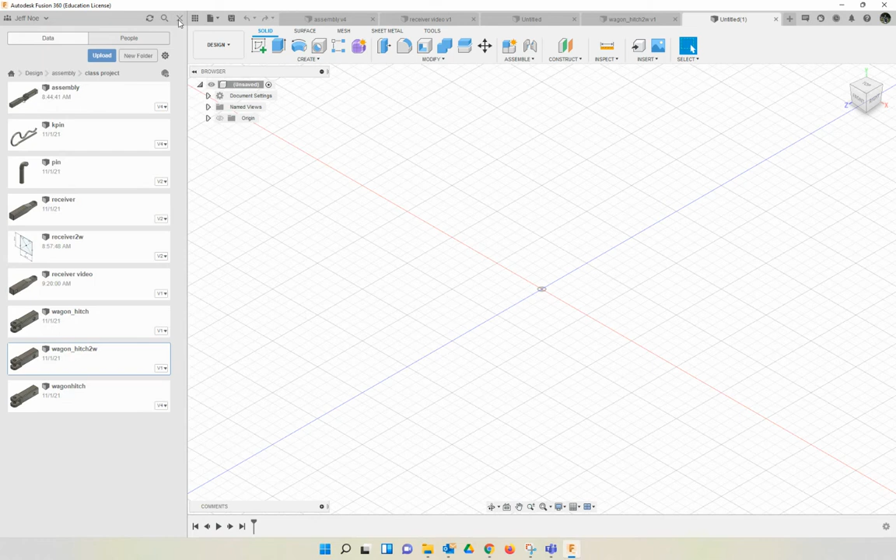Let's get started. All right, new canvas. There's my mouse, here we go. Close the data panel. First thing we're going to do is create a new component. I'll name it wagon hitch, and click OK.

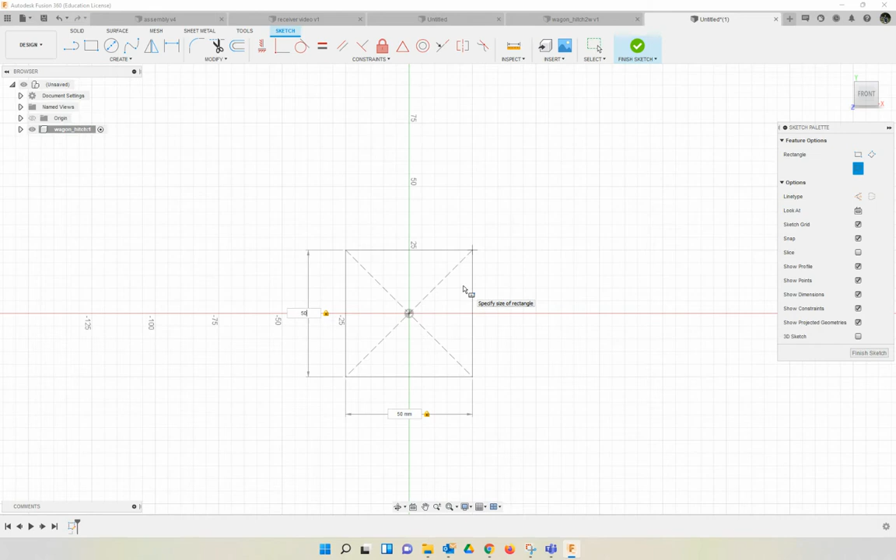Create sketch on the front back plane. Once again we're going to go with center rectangle, 50 by 50. Let's hit E to extrude, and we're going to go negative 150 millimeters, new body, click OK.

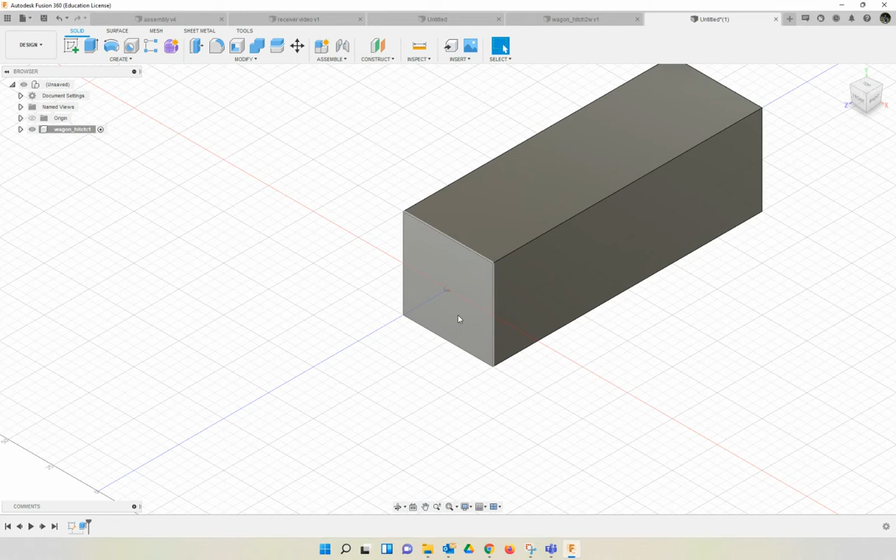Okay, so we're going to start building out from the front side of this, where we're going to make a little bit larger plate. Notice how the plate increases in size. We're going to come out about 15 millimeters. Yeah, that's 15 millimeters. We are then going to draw the top and bottom tongue, which should be 50 by 24 to 50 by 18.

Let me check the instructions real quick. 50 by 18, okay, they'll leave a 24 millimeter gap. This is 50 by 60, or 60 by 50. We're going to come out 60 millimeters. Then with the two rectangles we draw here, the 50 by 18, we're going to round off those corners and put our holes in place.

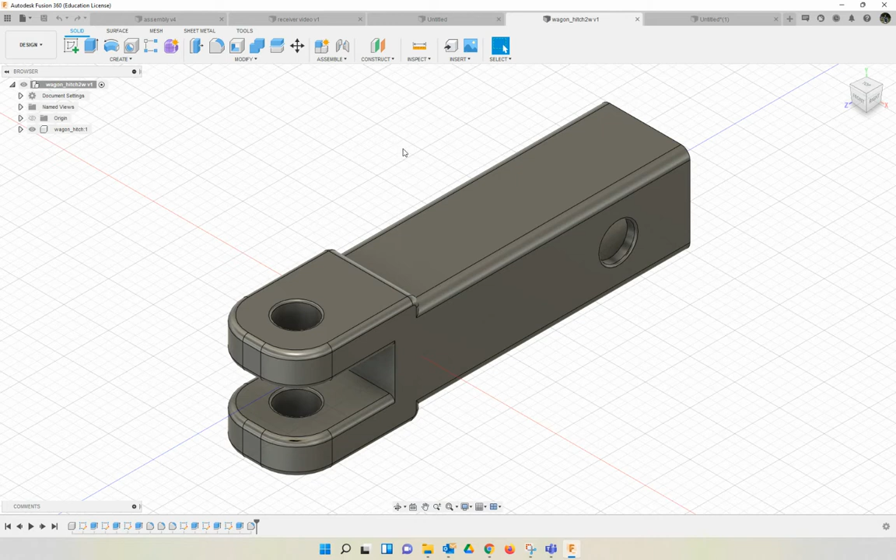All right, so let's get back to our design. Let's create a sketch. We're going to select the front face of this, so do not click on a plane - I'm going to click up here. I'm going to draw a center rectangle, 50 millimeters wide by 60 millimeters tall. Okay, got that? Enter.

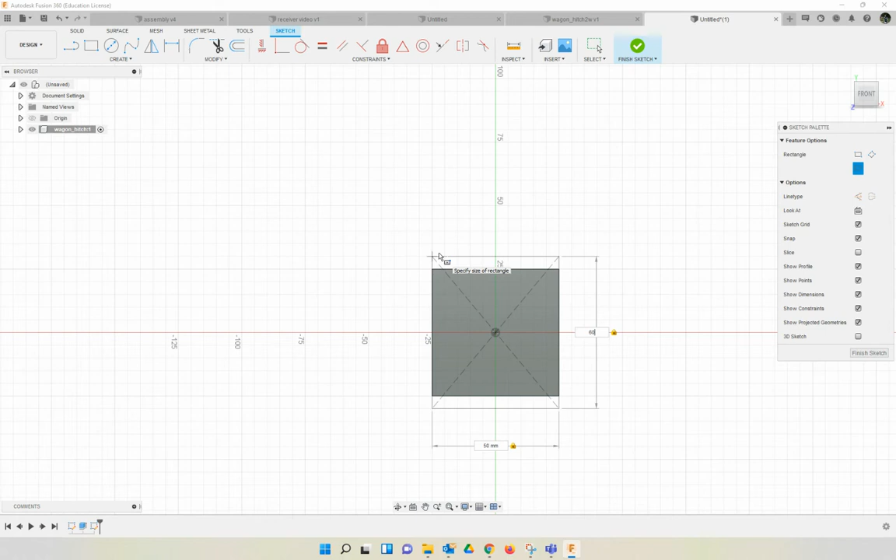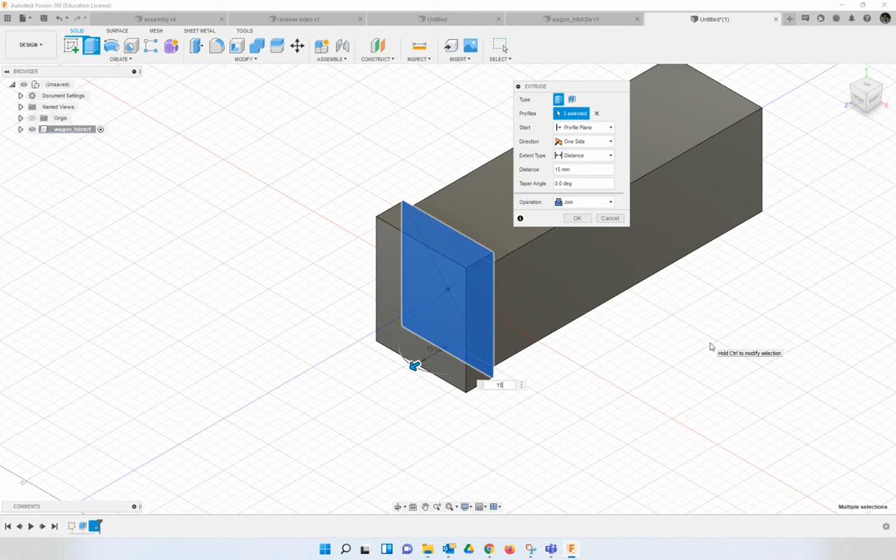All right, and we are going to extrude that 15 millimeters. Now we're going to have to select these three sections, okay, and 15 millimeters is what we'll extrude. Looks good, join is the operation. Good, now we're going to create our next sketch, once again on the front face.

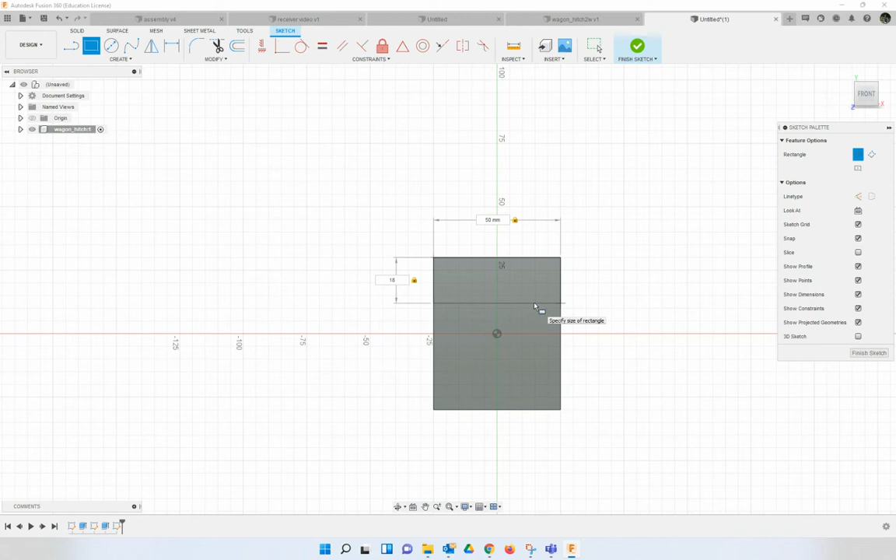Create sketch, select the front face again. This time we're going to go with a 2-point rectangle. We're going to start in the upper left corner, and it's going to be 50 millimeters wide by 18 millimeters tall, so we take that upper section of the plate. Good, we're going to do the same thing from the bottom - 50 millimeters wide, 18 millimeters tall.

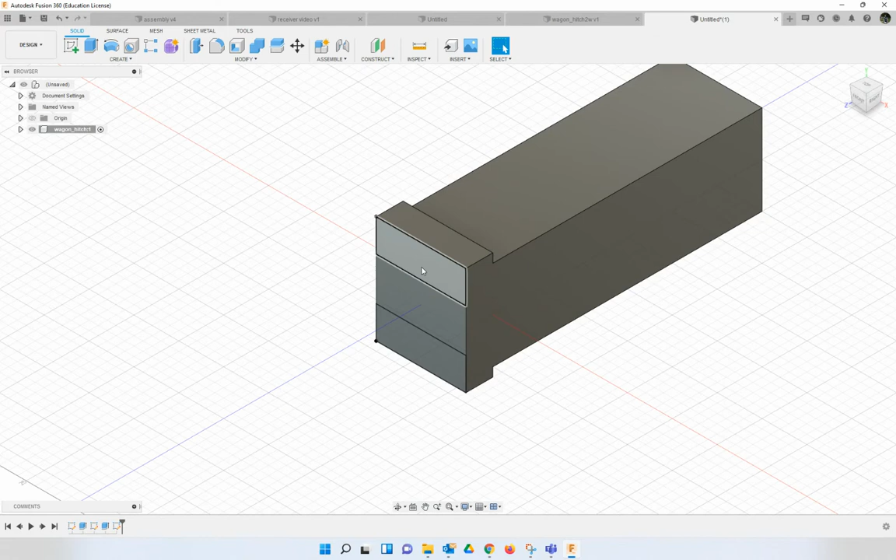Finish sketch, go to home position so we see our two shapes there. And we are going to extrude those by 55 millimeters. So extrude, select the first one and the second one, 55 millimeters. Good, there we are.

We are next going to start rounding off some edges here, okay? So we're going to add a 5 millimeter fillet to the 4 edges along the tube, the top edge here and the bottom edge here. So let's go ahead and do that.

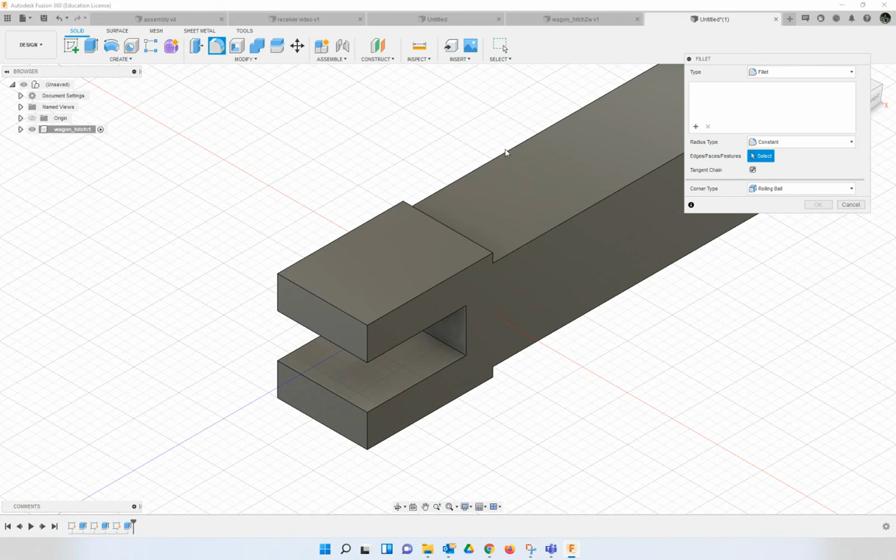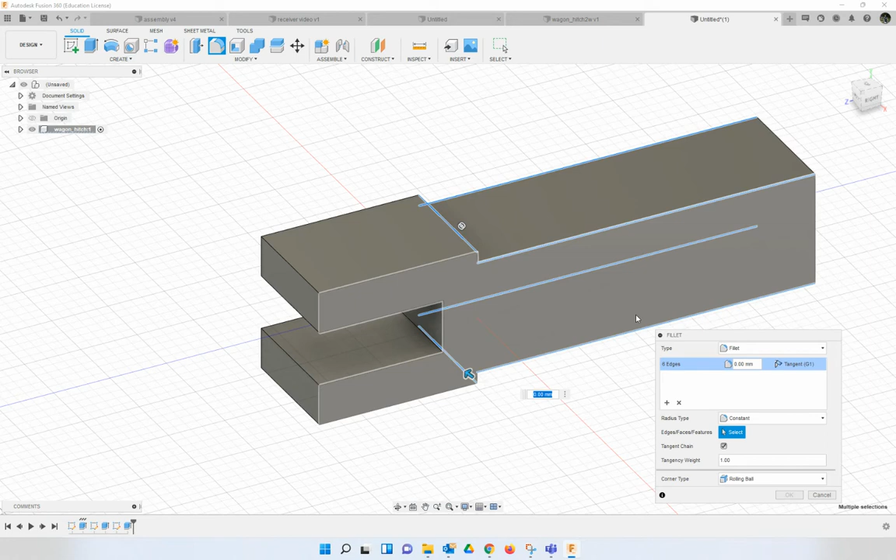Fillet - let's select all 4 of these edges. 1, 2, 3 - where is that? He's hiding back in there. There it is, there's the fourth one. Let's get this edge and that edge, 5 millimeters. Click OK. Now the order in which we do this is important.

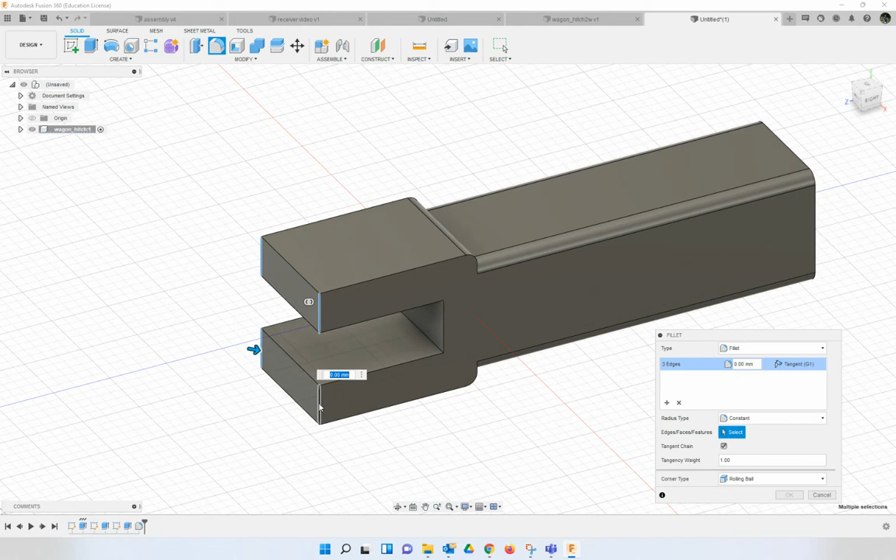Now we're going to take the 20 millimeter fillet on these edges - 1, 2, 3, 4, 20 millimeters. So that gives us a nice rounded edge on the ends of the tongue.

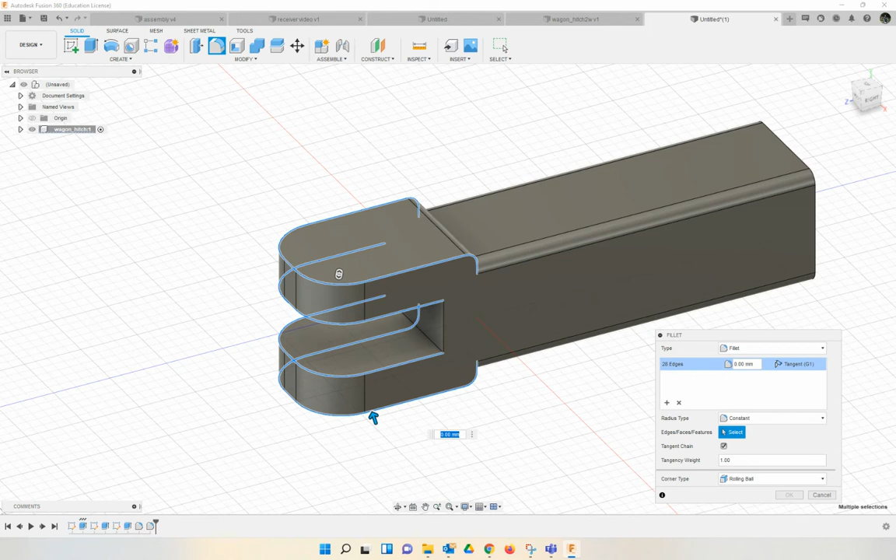Click OK. I want to add a 3 millimeter fillet to these 4 edges. So let's go fillet - there's corner 1, corner 2, 3, and 4. And I believe that's 3 millimeters. Yes it is, 3 millimeters. Click OK. All right, that looks pretty good.

Now, this being the end of the wagon, the tongue of the wagon - if that was a solid piece of steel, that'd be incredibly heavy to try and lift and put on the hitch of the tractor. So we're going to hollow it out, lighten it up a little bit.

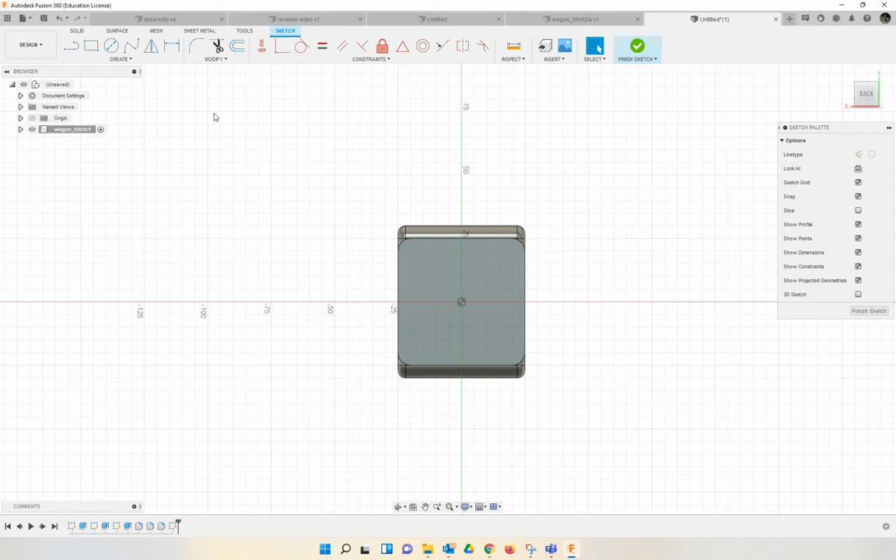So let's go and create a sketch on the back side of our design. Create sketch, we'll select the back. We're going to offset by 5 millimeters. There we go. Negative 5 would be best. Enter, we're going to extrude.

Hit the E key, finish the sketch, select my plane. We're going to cut away negative 135 millimeters. All right, looks good, click OK. So we've hollowed out the end now.

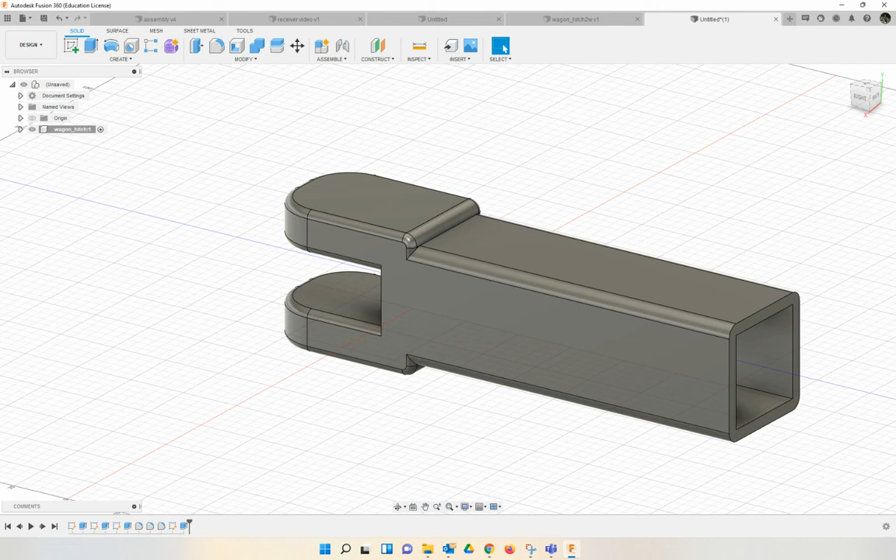All right, and now we will need to cut a hole in the back. Oh, I missed the sketch there. All right, let's create sketch - doesn't make any difference, we're good. Right on this face, turn on construction. We're going to go find the center point. Right there it is, click, 40 millimeters. The end point will serve where for the center of our hole we're going to create.

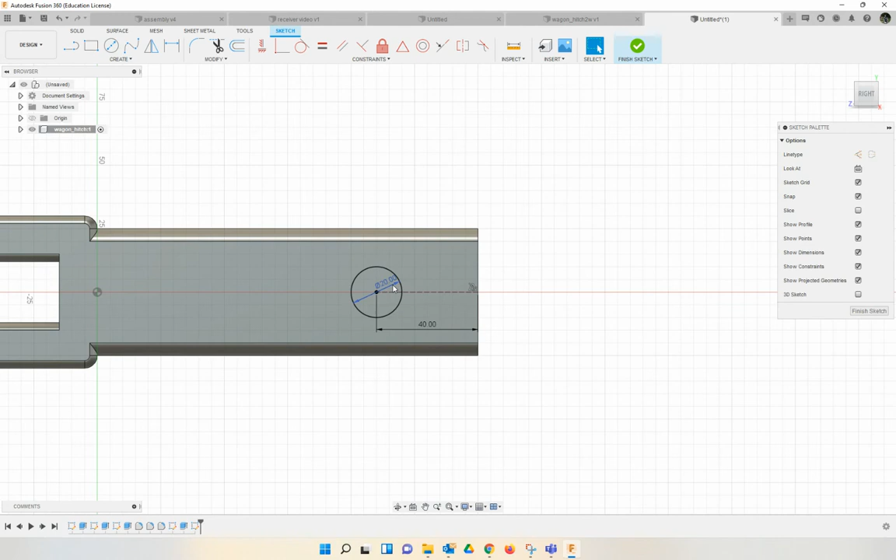Turn off construction, center diameter circle. The end point here, 20 millimeter circle. There we go. Let's hit E to extrude, finish, and it finishes our sketch. Select our circle, let's drag it through the other side. Good, cut is our operation. Click OK. Now we have a hole in the back, so we could interchange our hitch type.

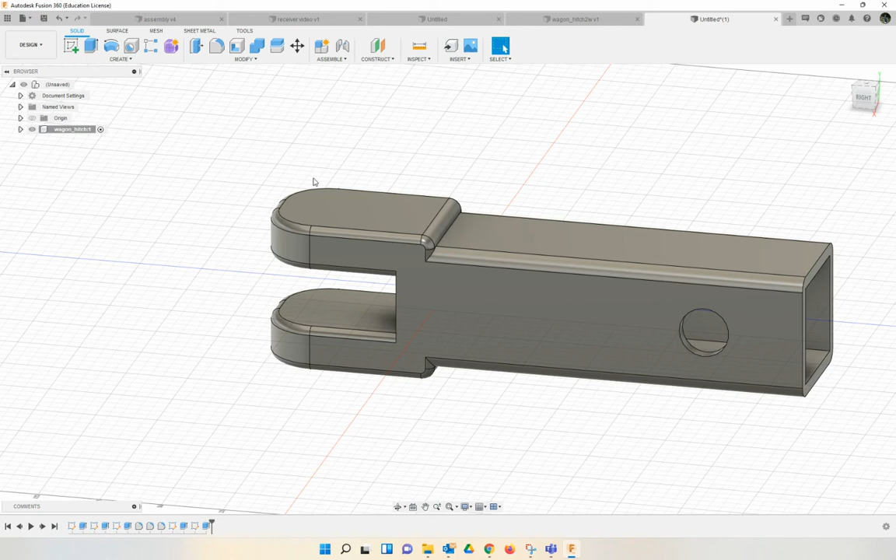And now we need to create the hole in the tongues. So let's create sketch - we're going to select this top face on the tongue here. We're going to turn on construction, and we're going to draw a 22 millimeter line. Find that center point - notice the edge I'm on, okay, not the outer one this time. Click, 22 millimeters.

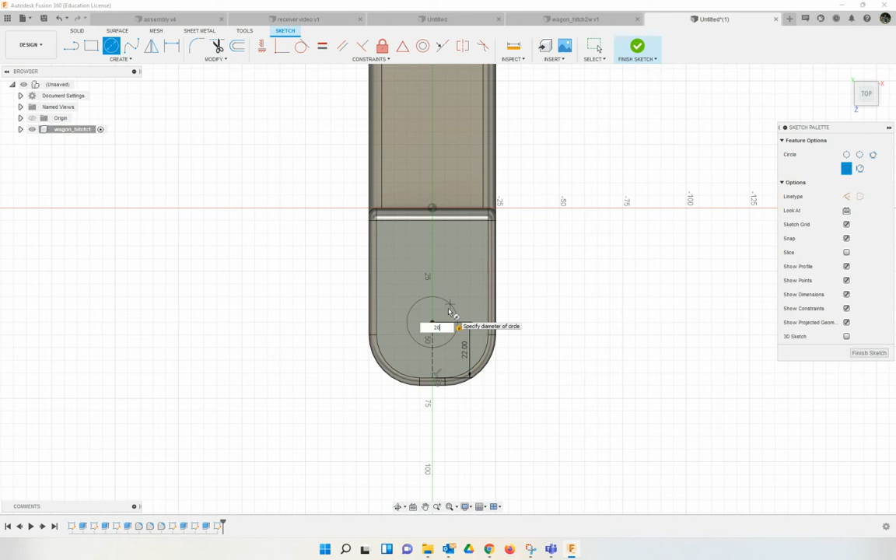All right, the end of that construction line will be the center point for our circle. I'll turn construction off - another 20 millimeter circle, center diameter circle. There we are. Hit E to finish sketch. Grab the circle, take it all the way down. That's good, click OK.

Let's add our 1 millimeter fillet to the edges of our holes here. Fillet - select all 8 edges, get this out of the way. One, get the outer one. 1 millimeter. Yep, all right, click OK.

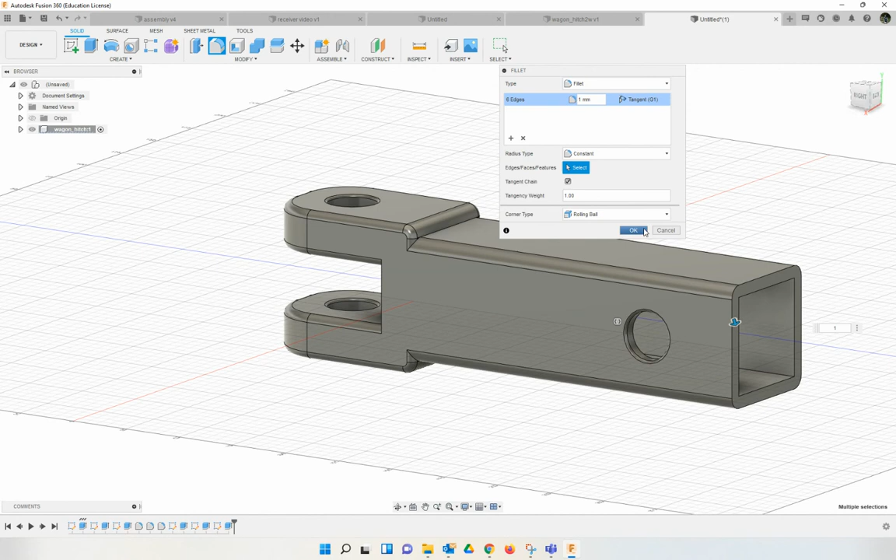The hitch side is done. Okay, now we'll come back in a couple short videos on creating the pin and the cotter pin. And last but not least would be the assembly. So I'll see you soon.